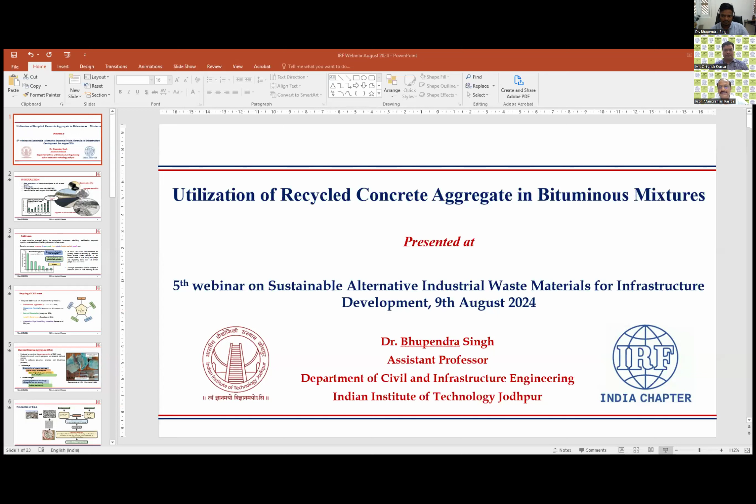Sir, is my screen visible? Okay. Yes. Okay. So thank you so much for such a warm introduction. Dr. Bhupendra, sorry, the slide is not in full screen mode. I can see it slide by slide, not in full screen. Okay, sir. Just give me a minute, and I'll share again. So is it in the full screen mode? No, it's not. Okay, just give me a minute. You are sharing through share screen only? Yes, sir. I'll share the entire screen, sir. Yeah, I think that will work. So is it okay now? Yeah, it's now good. Please go ahead. Thank you, sir.

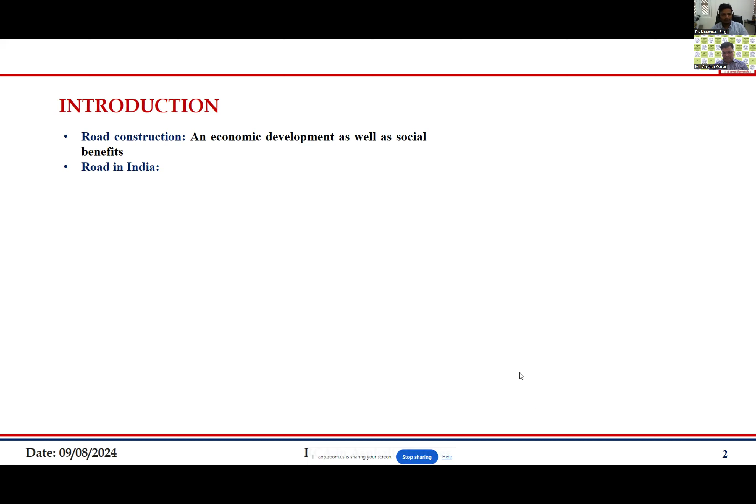When we talk about the road network in the world, we have approximately the second largest road network in the world, just behind USA and in front of China when it comes to length. The 2016 MoRTH report cited approximately 6.22 million kilometers of road length. Since 2016 we are again constructing roads at a very high pace. In this figure, with data taken from NHAI, you can see the highway construction rate per year has been increasing from 2015 to 2020. It has more than doubled, because in 2015 it was around 1500 kilometers of highway that we were constructing.

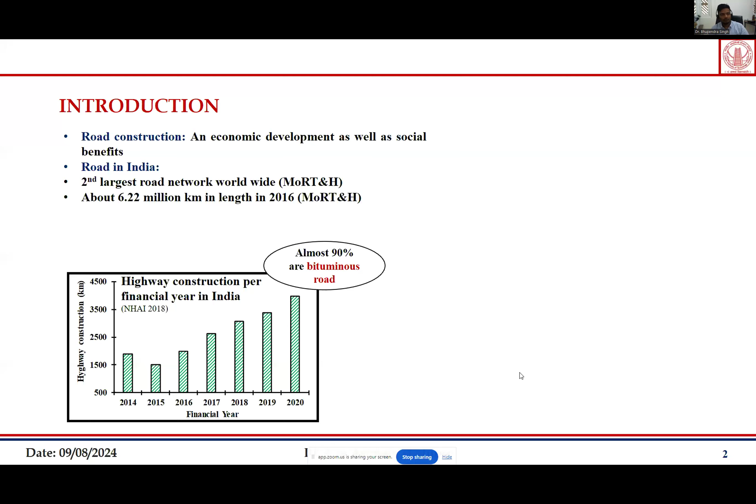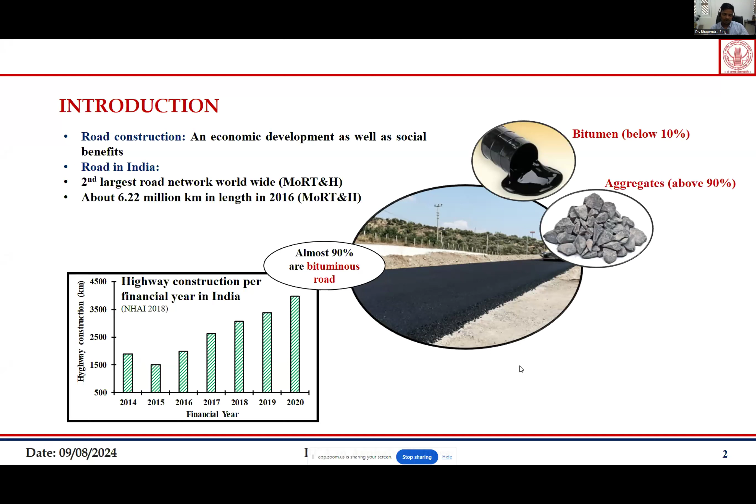So now in 2020, it is approximately 4,000 kilometers of highway that we are constructing. If we see the road network in India, almost 90% of these roads are flexible pavements, and out of these, most are bituminous roads with an asphalt concrete top. When we talk about bituminous concrete or bituminous mixture, bitumen is just below 10% of the total mix composition, and aggregates are above 90%. So aggregates make up most of the proportion of the asphalt mixture. Although it is good that we are constructing the road network at a record pace, which is the requirement also, it comes with some problems.

And what are the problems? One of the problems is the non-availability of good quality aggregates. In some parts of the country, the availability of good quality aggregates is very difficult, and even if those aggregates are available, if we consume too much of them, then that causes the depletion of the natural resources, because for the production of these natural aggregates, very environmentally harmful quarrying and blasting functions go on.

So that is not good for the environment. That is why that is a major concern, and that is the major challenge that the construction industry is facing nowadays. Now coming to another problem which we are facing nowadays, that is the production of construction and demolition waste. A waste material which is produced during the construction, renovation, rebuilding, modification, expansion, repairing and demolition of buildings and other infrastructure is called construction and demolition waste.

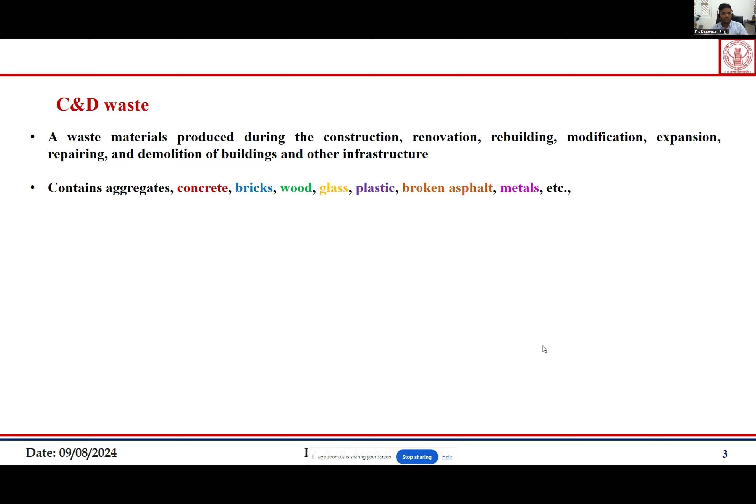When we talk about construction and demolition waste, it is composed of many things, which contains aggregates, concrete, bricks, wood, glass, plastic, broken asphalt, and metals. Whatever things you will find in a building, all those things are present in construction and demolition waste. But the major chunk of this construction and demolition waste is the concrete that we get out of it.

Now, this figure shows the construction and demolition waste that every country generated in the year 2017. Here we can see China is generating a lot more construction and demolition waste, and the next country is India, and then the USA, and some of the Western countries, which are France, Germany, UK and Brazil. The Western countries have one advantage: the disposal and recycling of this construction and demolition waste is very high. So most of their construction and demolition waste gets recycled.

But when you talk about India and China, the rate of recycling is very low. In fact, in India, disposal is also very poor. Proper disposal is not there, and whatever gets properly disposed, the recycling is again very low. Some of the problems generated due to that: for disposal, if we take it to some dumping yard, that consumes valuable land, and land is very precious nowadays. Another problem due to improper disposal, or even with proper disposal, is that it causes air pollution, land pollution, and due to leaching, groundwater pollution can also happen. So these kinds of problems are associated with it.

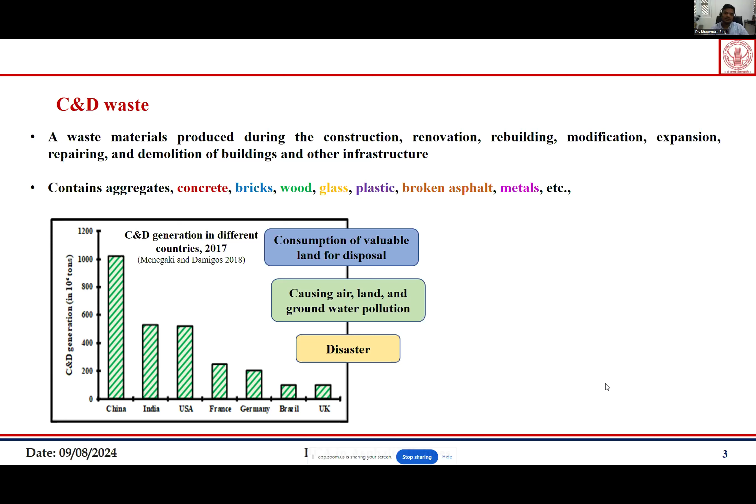Now another new kind of problem which we don't usually associate with construction and demolition waste is disaster. There are two instances which I'll be reporting here. One is, we all remember the devastating 2015 Chennai flood, which killed approximately 500 people and displaced around 1.8 million people. One of the factors which increased the intensity of that flood was construction and demolition waste. There was improper disposal of construction and demolition waste, and that C&D waste got into the sewer system and choked the sewer system of Chennai. So the water could not drain out from the areas, the intensity of that flood increased, and that caused the loss of so many precious lives.

Another such incident was reported in China, where an illegal construction landfill collapsed, which claimed 75 lives. That is also in 2015. So this shows that if proper disposal, and not only disposal but utilization, of construction and demolition waste is not done, then it may cause disasters also. So now we are coming to the topic of this presentation, which is the recycling of C&D waste and reusing it for construction purposes.

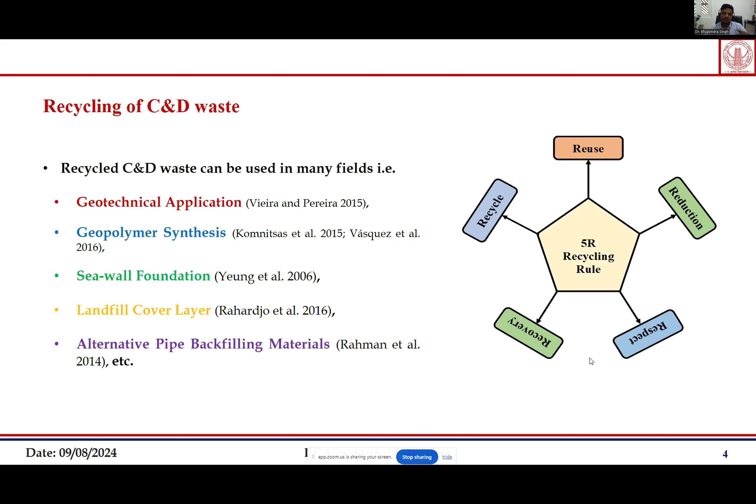Recycled C&D waste can be used in many fields. People have used it for geotechnical applications, meaning for ground improvement purposes. For geopolymer synthesis also people have used it. For seawall foundations people have used it. It has been used as landfill cover, which has been reported in the literature. And as an alternative pipe backfilling material also people have used it. But in this presentation we will be concentrating on the use of C&D waste in asphalt mixtures, because that is my research area.

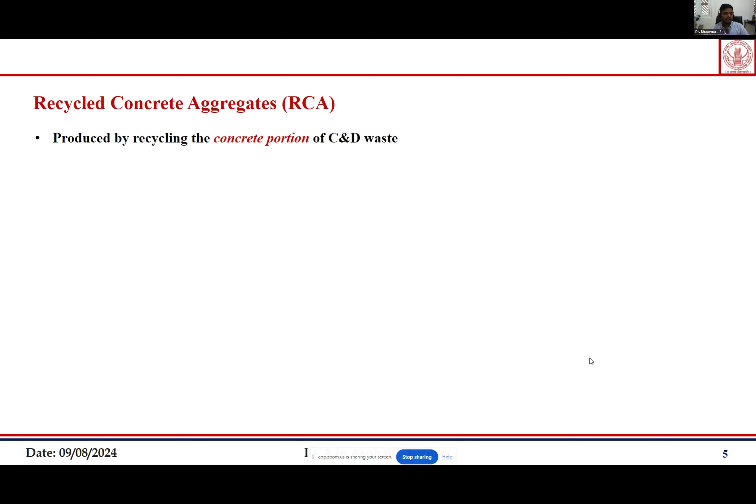So coming to the recycled concrete aggregate, what is recycled concrete aggregate? As we talked, a big chunk of the C&D waste is old concrete blocks that are generated. So if we recycle those concrete blocks and get the aggregates out of them, then that is called the recycled concrete aggregate. So when we see any recycled concrete aggregate, it contains natural aggregates, which we can see here, and then there is a layer of adhered mortar, because it was part of concrete, so there will be some mortar which is still attached to those aggregates, and that is what you will find in any recycled concrete aggregate.

Now people have used this recycled concrete aggregate in the unbound pavement layers, cement concrete and bituminous concrete also. Now, what are the advantages of using this C&D waste to replace some of the natural or virgin aggregate? First is the preservation of the natural resources, because it replaces some of the virgin aggregate. Then the requirement of the virgin aggregate goes down, due to which preservation of the natural resources happens.

Then, if we compare the energy consumption in the production of the C&D waste and in the production of the virgin aggregates, we will find that production of the RCA, or recycled concrete aggregate, consumes less energy as compared to producing virgin aggregates. And because we are consuming less energy, the harmful gas emissions are also low in case of recycled concrete aggregate. And there are many cost benefits also associated with recycled concrete aggregate.

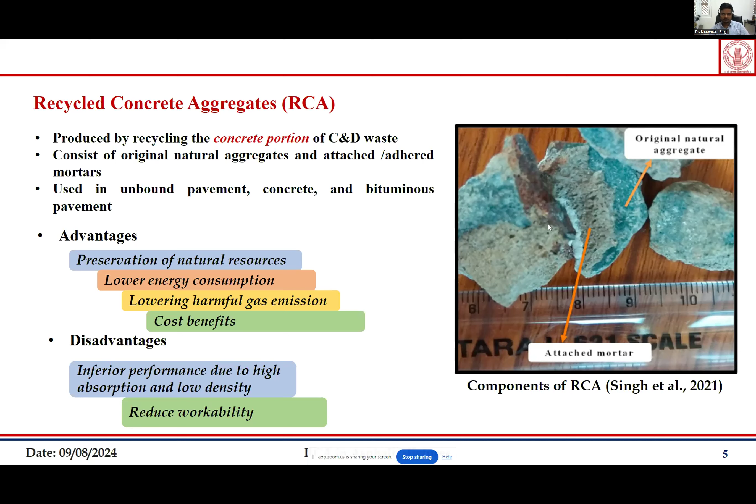Now moving on to the production of the RCA. I'll go fast in this. So first, this C&D waste is generated. There are two sources of generation of this C&D waste. First one is the artificial source, which comes through construction and demolition practices, and second one is the natural source, which comes because of disasters. So earthquake, flood, cyclone, because of these, a lot of C&D waste is generated in a very short period of time. So when we get this C&D waste, it is like a large chunk of concrete.

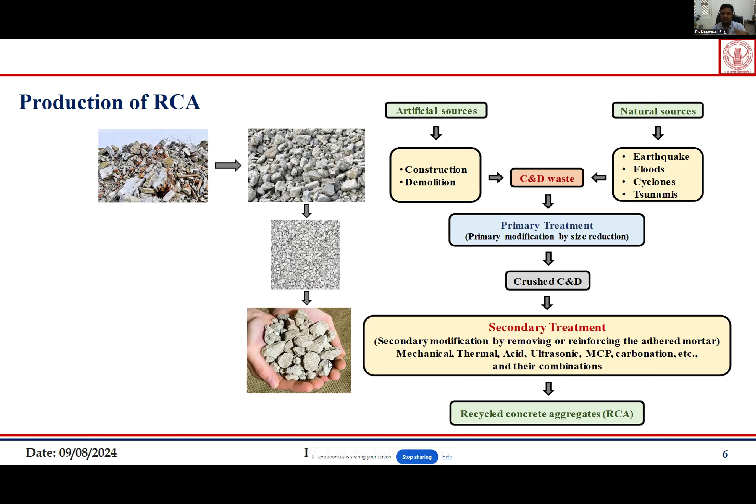Then we do the primary treatment. It means we break it down into manageable pieces, which you can see in the second figure. Then from there we get the crushed C&D, construction and demolition waste. Then the secondary treatment takes place. It means we try to remove the layer of that adhered mortar, because that is the problem, or we try to reinforce the layer of that adhered mortar in its place. So that is how secondary treatment takes place, and finally we get the recycled concrete aggregate out of it.

Now there are many methods of treatment of the RCA. The first type of methods comes under the category of removing the adhered mortar. We want to remove whatever mortar is present on the aggregate surface. So the first treatment type is thermal. We remove the adhered mortar by heating it up to a very high temperature. Due to that heat treatment, because the coefficient of thermal expansion of aggregates and that of adhered mortar are different from each other, some thermal stresses develop, and then the adhered mortar gets detached from the surface of the aggregate.

Second one is the mechanical, and most common one. In the mechanical method, we use some of the mixers, or in the laboratory we use the LA abrasion machine also. So we use abrasion and attrition techniques to remove that adhered mortar which is present on the aggregate surface. Then ultrasonic methods are also used.

So first we dip our C&D waste into the water, and then we apply some ultrasonic waves, and due to the application of these ultrasonic waves, the mortar gets removed from the surface. Then people use some acid soaking techniques also. In that, we prepare acidic solutions and soak our C&D waste in them. Then the acid reacts with the hydration products present in the mortar, and it gets removed from

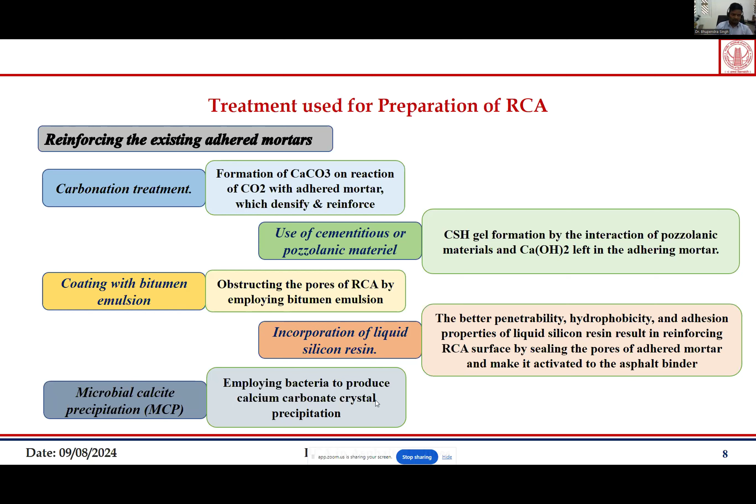Incorporation of liquid silicon resin people have also used, and nowadays people use MCP bacteria also. We apply the bacteria on the aggregate surface, these bacteria produce calcium carbonate crystals, and these crystals improve the bond between the adhered mortar and concrete. So these are different methods people have used.

If we see the characterization of RCA, physically they are very highly absorptive in nature. They have lower density, higher impact value, higher abrasion values, higher crushing values, and they are rough, porous, flat, and irregular in shape. In the chemical characterization, you will find that SiO2 content is really high in these recycled concrete aggregates, which is a problem from the asphalt mixture point of view, because aggregates with higher SiO2 content are poor at bonding with the asphalt binder.

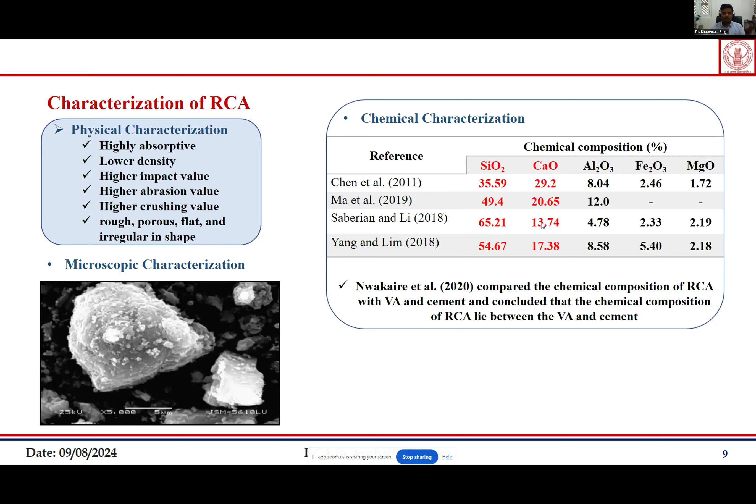Coming to the microscopic characterization, you will see that the surface of RCA is much rougher compared to natural aggregates. So these are the characterizations of RCA. Now moving towards modification, people have used different modification techniques and have also combined techniques, as we have discussed: physical, mechanical, thermal, and acid soaking techniques, and they have found that these techniques work really well.

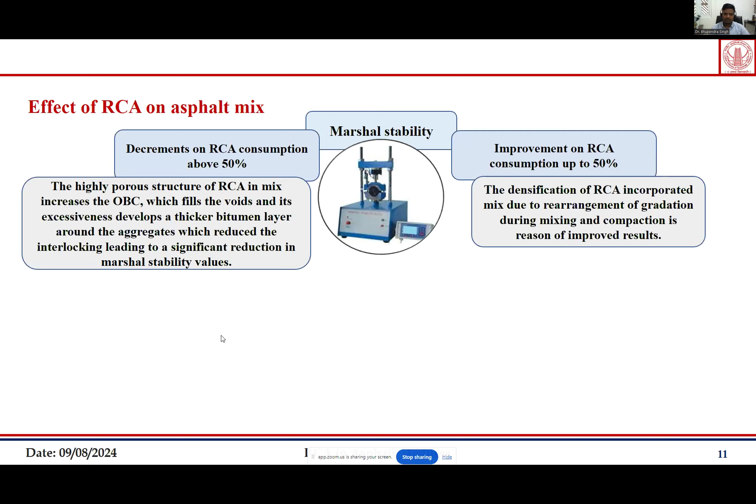Now, what is the effect of using RCA in asphalt mixtures? RCA is very variable in nature, because most of the time, whatever RCA we are collecting, we don't know the history of that concrete, where it is coming from, and what its specifications are. So in each of the properties we are talking about here, you will see some studies have found RCA to be really improving those properties,

because in some cases RCA has some unhydrated cement particles, and they get hydrated, due to which they improve the performance, and that is what we also found in one of our studies. RCA has a rougher surface also, so due to that rougher surface, the interlocking gets better in some cases.

So in Marshall stability, people have found that if you use RCA above 50%, the Marshall stability values go down. Researchers have also used up to 50% and found that it actually improves Marshall stability. Similarly with ITS, the same trend was seen.

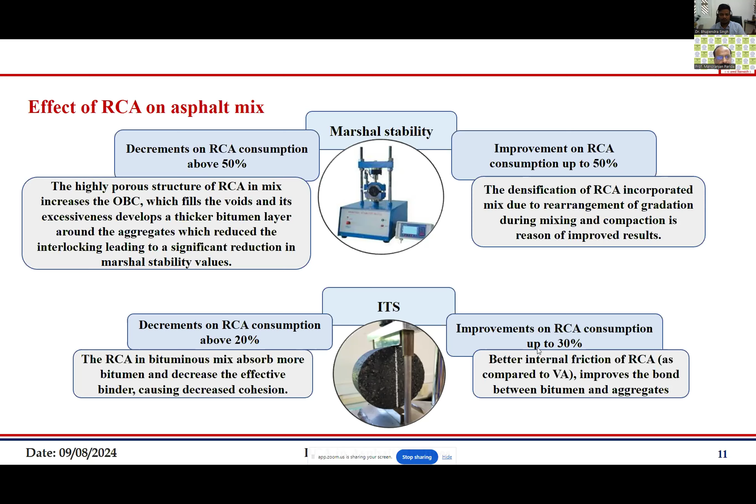Similarly the case was there for rutting, for fatigue, and for resilient modulus values also, and moisture susceptibility and low temperature performance also. So in each of these cases, people found that in some cases it improves the properties, and in some cases it decreases the property.

So from here the problem primarily associated with RCA comes to the forefront - there is too much variability in whatever RCA we are collecting. That is the major problem, and that is why field implementation is also not getting much traction at the moment.

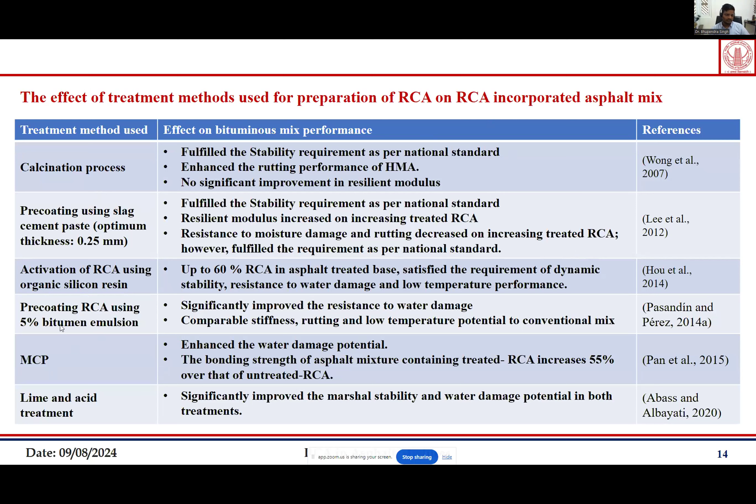Then MCP is there, pre-coating the RCA with bitumen emulsion, using lime, and many studies have used cement also, because cement is a very popularly used filler material in asphalt mixtures, and it is easily available. So many studies have used cement to coat the aggregate and then use it in asphalt mixtures, and they found that it performed really well.

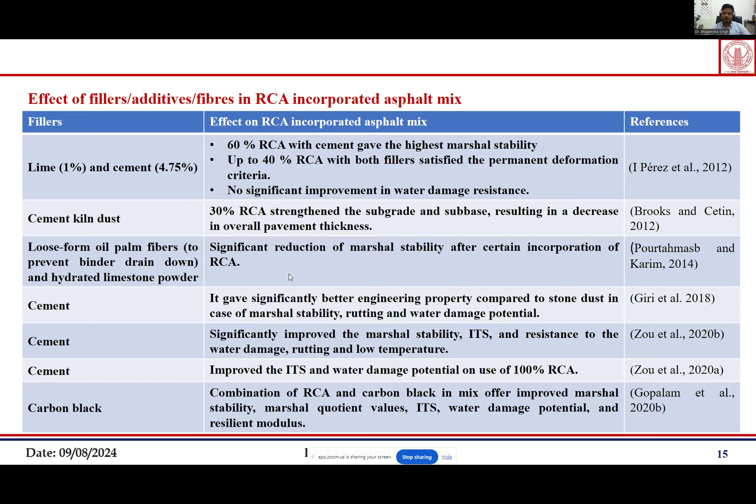But there are some problems associated with RCA. We have shown that RCA can be used, and there are some treatment methods using which we can improve the properties of the RCA and asphalt mixture also.

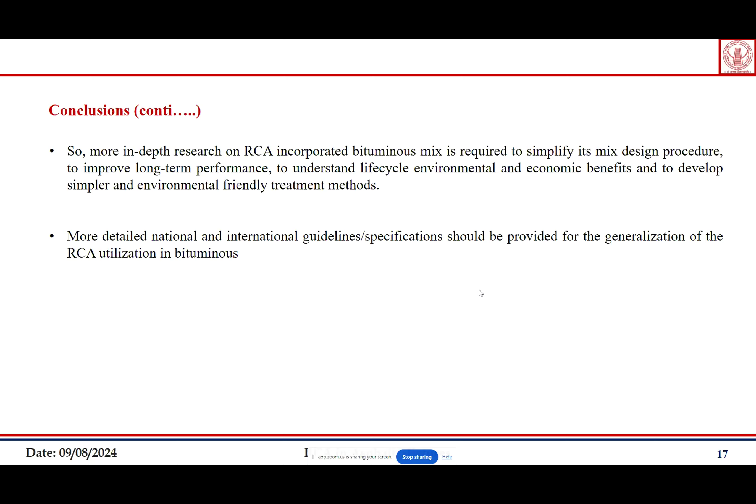But at the moment, the problem is the variability in RCA quality. Currently there are no standard treatment methods for RCA treatment, and no mix design method for RCA. Because of all this confusion, I feel practitioners are still hesitant to adopt it in the field. That will be my concluding remark.

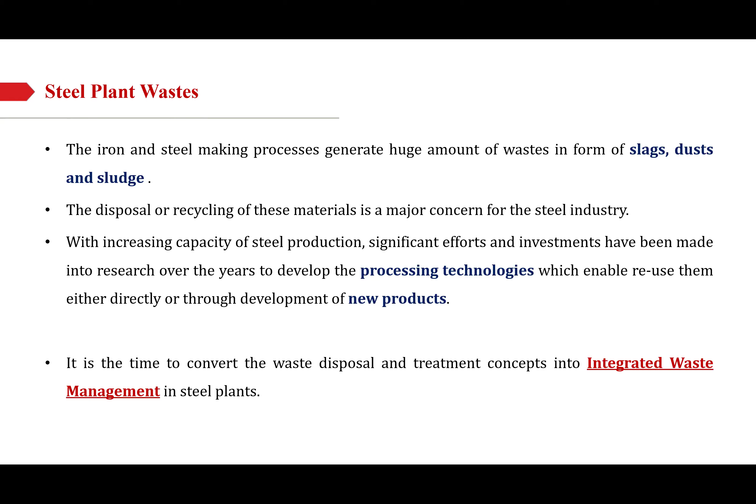But again, when I say we want to recycle the material, we want to reuse the material, the word sustainability comes into picture. Sustainability has a quite broader umbrella - it not only encompasses the application, but also has to take care of the economics of disposal. You cannot simply dump it; you have to find some way, some means by which it can be economically converted into an application.

When I say sustainability, there are two parts of it. First is the technology part of it, and usability, and second part is the economics. The examples I'm going to share with you today actually take care of both and make good business opportunities for a lot of prospective entrepreneurs, and a very win-win solution for both the steel industry as well as the construction industry.

Normally, when we see the steel plant, it has a huge cycle, starting from the iron ore, what we receive, we beneficiate, then agglomerate, then iron making, then steel making, then rollings, etc. And there are so many wastes being generated at different points. During beneficiation, we generate a lot of tailings, then dust at a lot of places, sludge at many steps of processing, then slags, and then scales.

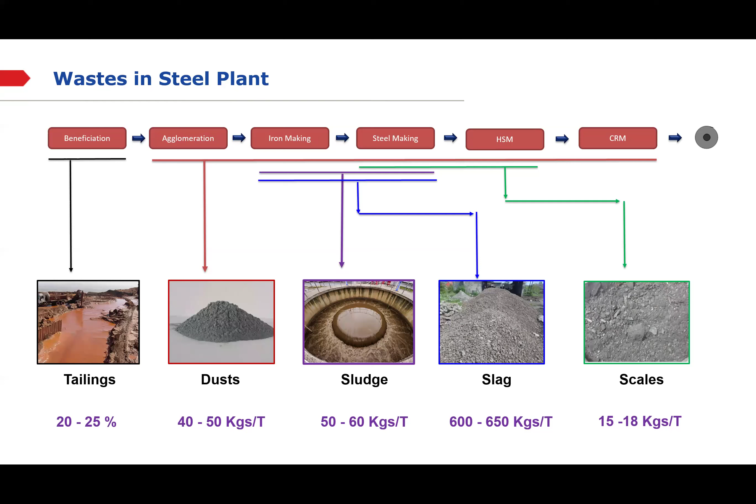Now, if you see these quantities, the biggest component among all these is slags. I would say if slag is taken care of, almost 75 to 80% of the total waste generated is taken care of. When I say these wastes are being generated, we need to actually understand them by putting them into certain groups.

We see that we can put them into two categories. Tailings and slags are one type of category where you have maybe a little bit lower iron, but higher silica and alumina, whereas dust and sludge mostly contain higher iron. So most of the technologies which have been developed in iron and steel industry basically direct the dust, sludge, and scales to recycle back into the process of iron making, steel making. But the tailings and slags are the kind of byproducts which are basically seen to be used outside the iron and steel making process in some other industries.

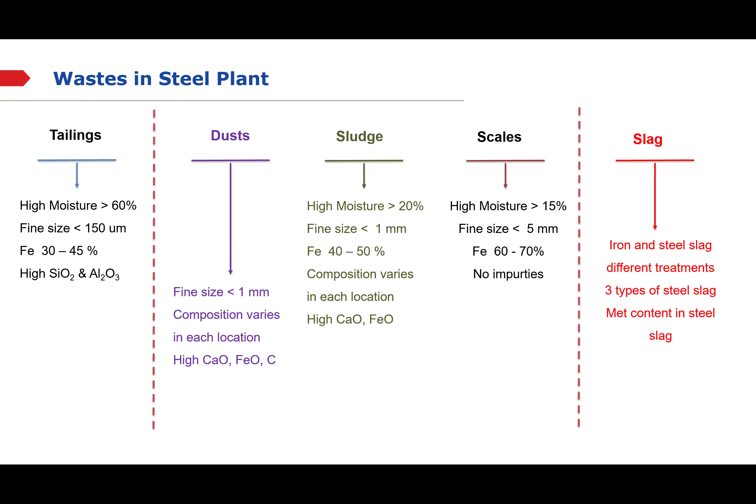That's the basic concept of all the waste which is being done. Now, let me tackle one by one on this tailings and slags.

Tailings is nothing but what we generate as a byproduct during the beneficiation process. We get a lot of low grade ores. We have a step of beneficiation where we upgrade the iron ore from a particular value to a higher value, and then the gangue is separated out. They're normally wet in condition and normally used to be stored in large tailing ponds, etc., which end up in a lot of issues sometimes when its bund breaks, etc.

Now new technologies have come up where we use a press filter, we dewater them, and then we use it back in mine backfill. This is a very interesting application which has recently come up, where dry disposal of these materials has come up, and because of the concerns of the mining industry of rehabilitation and reclamation, etc., the tailings have become a very good solution to build and maintain those mines which have been left out after sufficient mineral has been taken out.

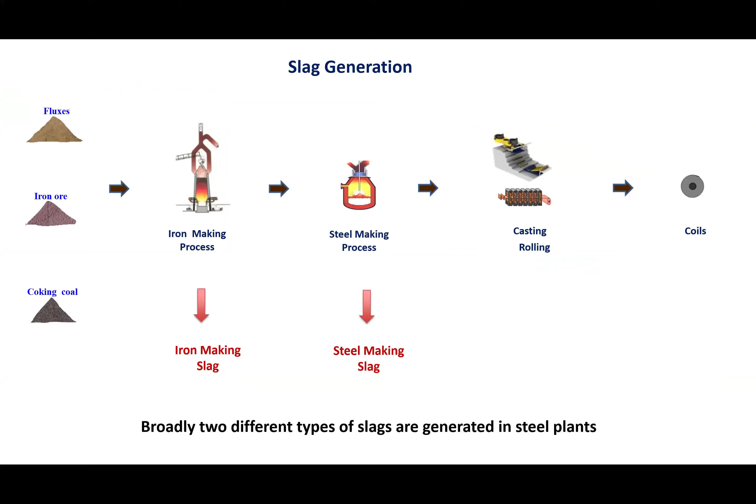Coming back to slags, normally slags are generated in two steps: iron making and steel making. And again, in steel making, there are different types of slags. All these slags which are generated from iron making, steel making process normally come in molten state, and they are processed differently based on different technologies.

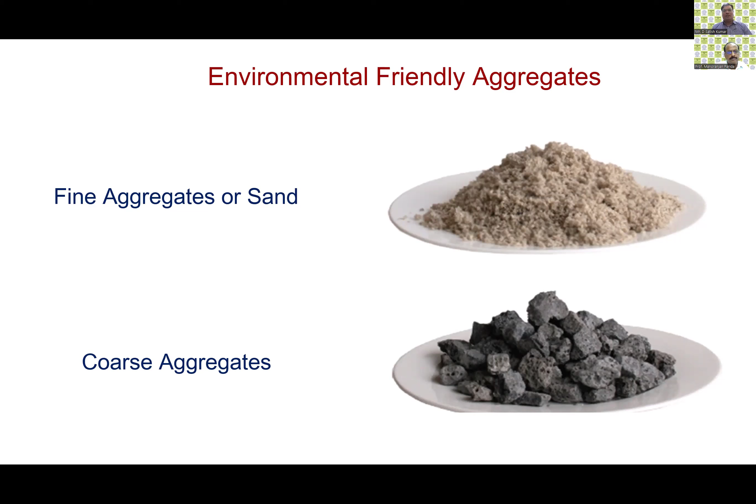But finally, what we are trying to claim is that all these slags can be converted into fine aggregate as well as coarse aggregates. Both can fit to match the specifications of fine aggregate and coarse aggregate, which are being used in all the construction applications. I will share many examples starting with this.

When I say we generate two types of slags, the iron making slag and steel making slag - if we see till now, not much of these slags were getting utilized. Maybe what I'm saying is till 5-7 years back, and a lot of interest has come up from both sides to convert them into specified aggregates, and then the acceptance of these aggregates by the construction industry also.

So iron making slags are normally granulated, and used to go for cement making. But over a period of time, with increasing capacities, iron making slag also is getting accumulated by steel plants. Steel making slag normally used to get dumped because of its own inherent properties of containing iron - it's non-cementitious. And if you go to any big steel plant, you will find mountains of these slags lying there, stored over past few decades.

And today we have a solution by which it can be converted into aggregates. Coming to iron making slag, as I said, most of this is normally granulated and used for cement making, and a part of it which is not granulated is normally used for landfilling and dumping. What has been done recently is that especially this granulated iron making slag, which looks like river sand but has never been utilized as a fine aggregate or a replacement of river sand.

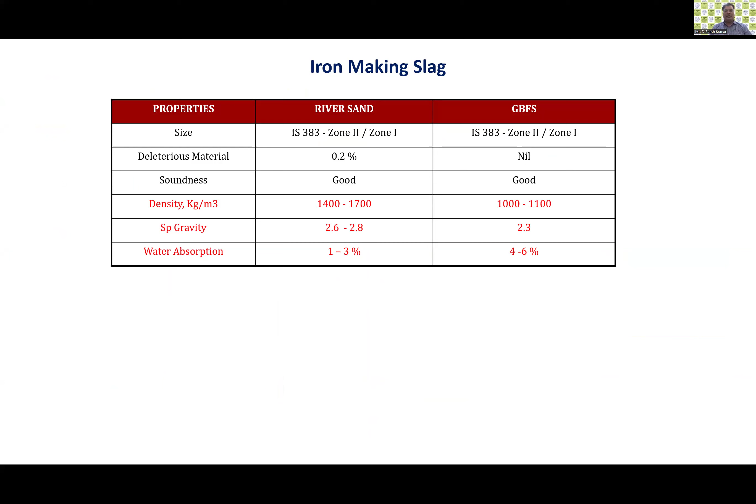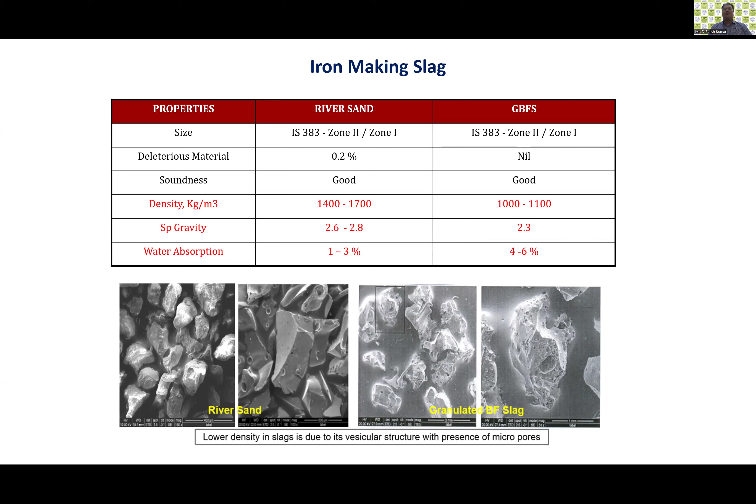What we have done here is we tried to investigate what could be done to this granulated blast furnace slag and convert it into fine aggregate. We made a comparison with river sand. We find that granulated blast furnace slag was having lower density and lower specific gravity, higher water absorption. Those were the primary reasons by which it has been tried but never commercially utilized for being used as fine aggregate.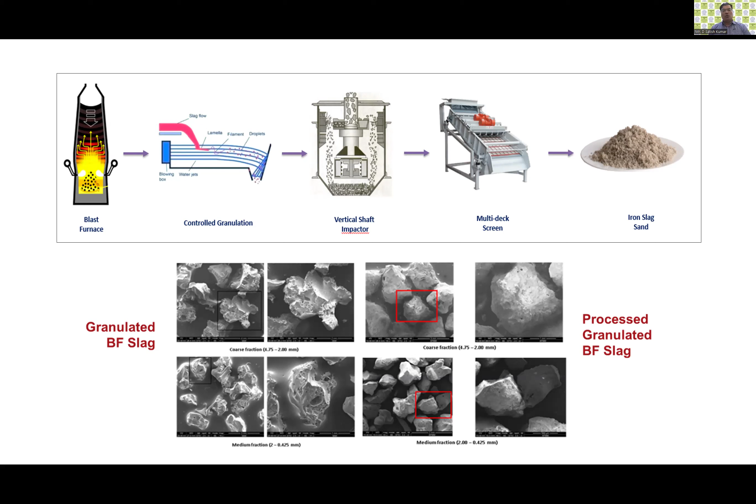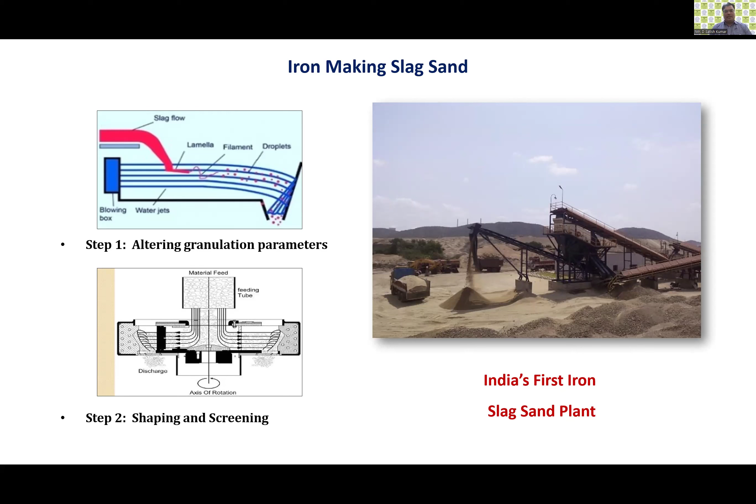Once it was compared, we find that this process granulated blast furnace slag could be 100% replacement to the river sand which is being used in the construction industry. That's how at JSW Steel Vijayanagar Works, we set up India's first iron slag sand plant. For the last 7 to 8 years, more than 3 million tons of this manufactured sand or granulated blast furnace slag sand has been sold in and around Karnataka, Kerala, and Tamil Nadu, etc. That's a very, very ideal example of converting waste into a product.

Recently, we are also developing a technology by which this granulation process, which used to happen with water and was one of the reasons for highly porous material, has been replaced with dry granulation of these materials. By doing a dry granulation, I'm getting a more rigid structure, and these fine aggregates can be utilized and found more useful, more rounded directly, and a lot of processing steps can be avoided. So this is also a development which has been done from the iron and steel industry to convert these wastes into products which can be sustainably utilized in other industries. Dry granulation is kind of a future technology which is coming for iron and steel making people, especially for granulating this blast furnace slag.

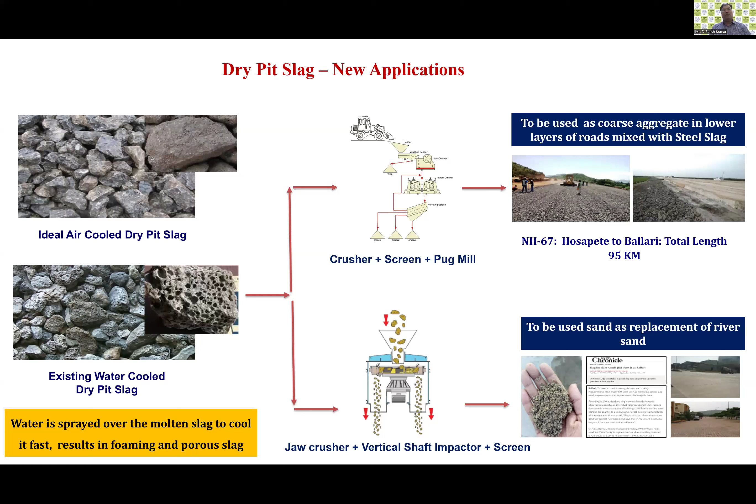During the iron making process, we also get some amount of coarse slag or solidified slag in the pit which comes out. This can also be processed and utilized either as coarse aggregate, or we can crush it and utilize it as fine aggregate. We have done both these exercises at JSW Vijayanagar Works and in NH67 Hosapete to Ballari Road. A lot of this crushed dry pit slag from blast furnace has been utilized in road construction. We also crush it to very fine pieces, and a fine aggregate has also been made using this material. These technologies are now commercially established and running at Vijayanagar Works.

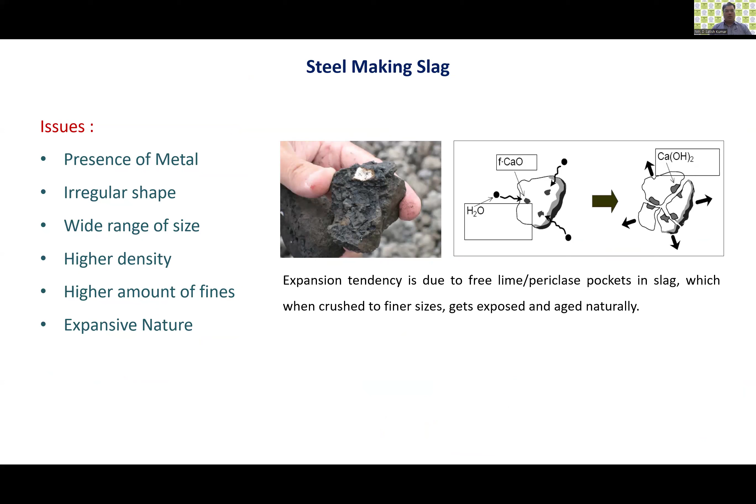Coming to steelmaking slag, it always has inherent issues because of its expansion behavior, which comes from the free lime and the free MgO present in it. It also contains a certain amount of metal. It has higher density, its shape is quite irregular, and that's why it never attracted the attention of the construction industry for being used as an aggregate. Over a period of time, a lot of solutions have been developed to age these materials, starting from natural aging to dry and wet aging to open steam aging, even pressurized steam aging and steam box technology. Even chemical stabilization of these slags has also been developed.

These are the kind of technologies which are being developed in-house at many steel plants around the world. These technologies make this slag conducive and matching to the specifications of the construction industry for these aggregates which are being used. Now, these are additional steps which are being adopted and commissioned in many steel plants, including JSW Steel, where we are trying to convert this waste, avoid dumping, and convert it into products to be used.

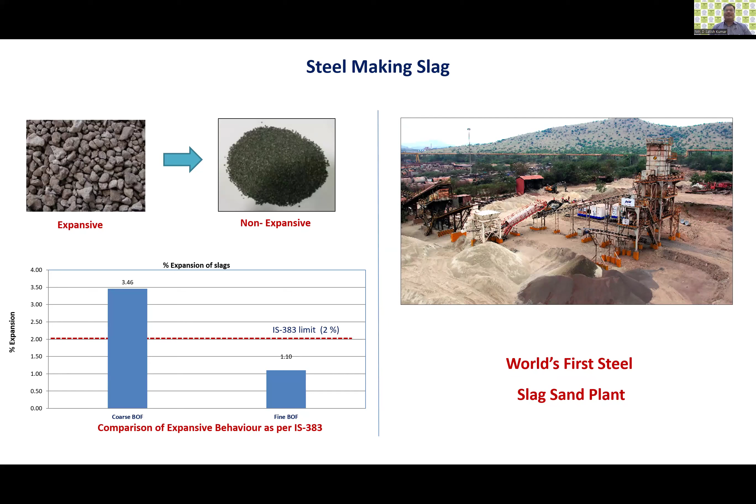What we have done at our place is we try to crush them very fine. Otherwise, because of the expansion behavior, if it has to be used as a coarse aggregate, we need a lot of aging steps to convert them into product. We crush them and make it very fine, where its expansion behavior significantly reduces, because the free lime and the free MgO present in it, which are expansive in nature when they come in contact with water, get removed. The process has been developed in such a way that those fines are sucked and removed, and that's how the world's first steel slag sand plant has been established at JSW Vijayanagar Works, where we started converting our steel slag into steel slag sand.

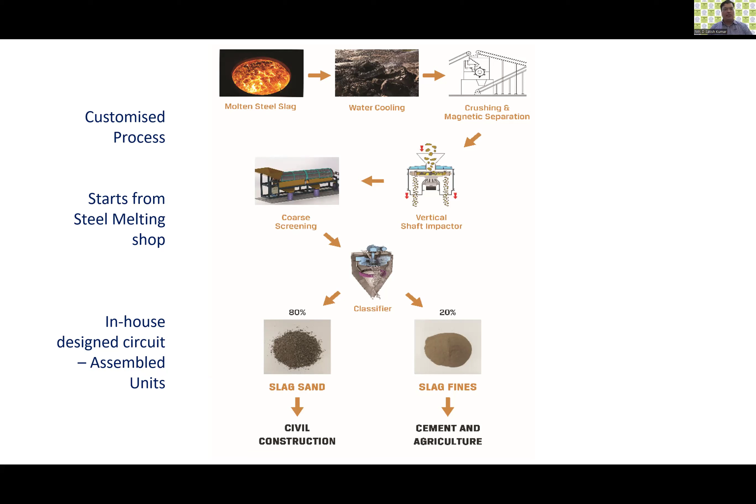This process is a little different from what we used to make sand from our iron making process, where the fines were not an issue. Here, the fines were a bigger issue. So we have adopted a dry classifier where the fines are sucked and removed, and that's how we get two different products out of this whole process. With the process patented by us, we get a slightly higher density sand for use in civil construction, and these fines can be used in cement and agriculture. That gives an end-to-end solution for this huge amount of slag generated in steel plants, which normally used to get dumped, and is now getting converted into products for the construction industry.

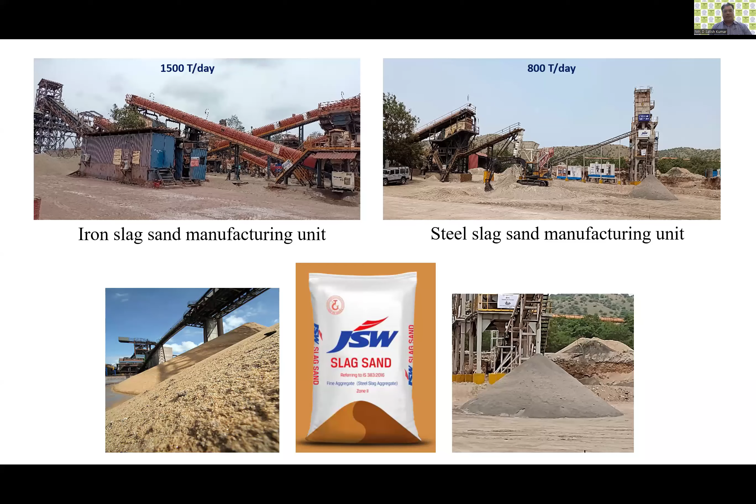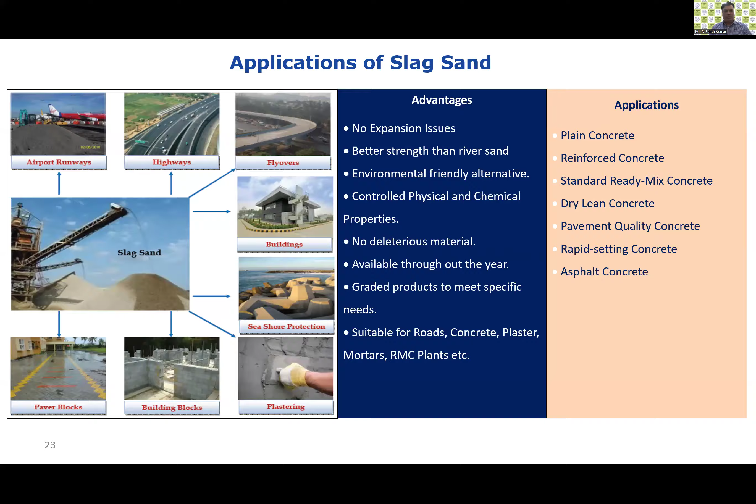That's how at JSW Steel we established a 1500 tons per day iron slag manufacturing unit and a steel slag manufacturing unit, first of its kind in the world, at a single location, where the waste is converted into a very useful product supporting the construction industry. These fine aggregates are way ahead, and we call them eco-friendly because river sand comes from rivers and M sand comes from mountains, and they both impact the environment. This is eco-friendly, available throughout the year, with very consistent composition from the iron and steel making process. These have been tried at various agencies, including CRRI, and found usable for almost all applications: buildings, paver blocks, plastering, highways. We even started using it internally.

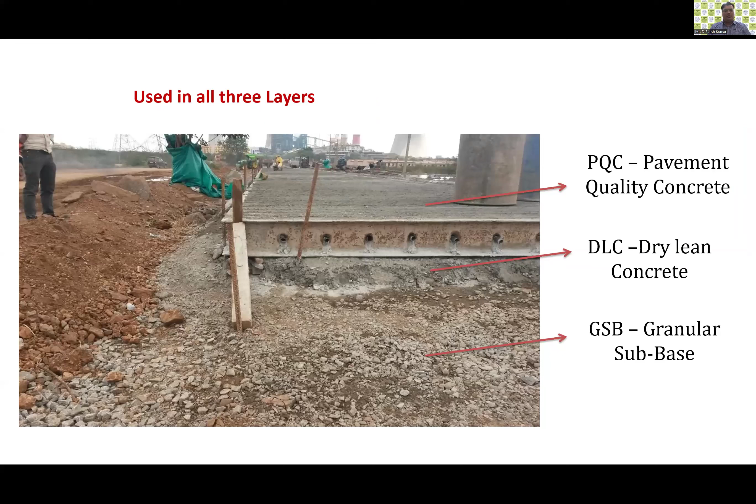Iron and steel making units are very heavy industries. We make steel coils of 20, 30, 40 tons, and the floorings and other construction areas have been built using these slags, working for many years under these heavy loads. We have also specifically started using them in roads, because roads are one area where a large amount of these slags can be consumed, both in coarse and fine form, and all different layers have been experimented. We also tried at NH67 Hospet Bellary, using electric arc furnace slag and blast furnace slag.

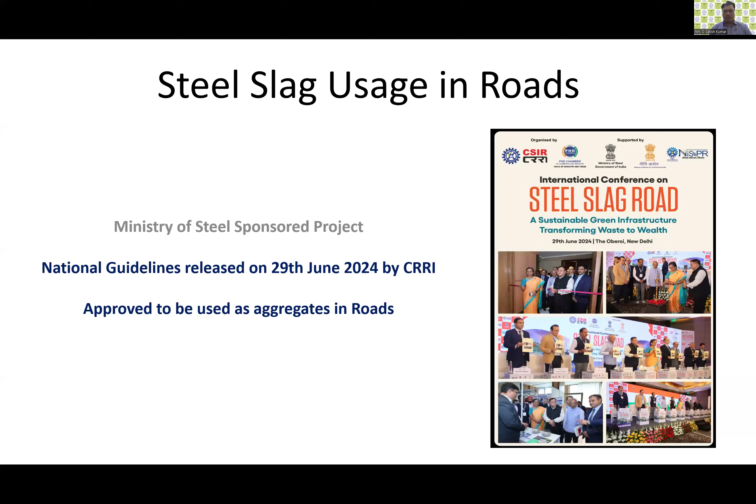But the most important thing done in recent years: all steelmakers were doing this slag utilization in their own domain. Recently, the Ministry of Steel and CRRI came together on a national project for developing guidelines for steel slag, which brought a lot of clarity, and CRRI released these guidelines for use in roads in June. The most important part is this table, which gives guidelines to all steel makers as well as users, for the first time, I would say, in the world. Mr. Satish Pandey and his team have come up very clearly with the limits for BOF, EAF, and CONARC type slags, the permissible limits, and the test methods to be utilized.

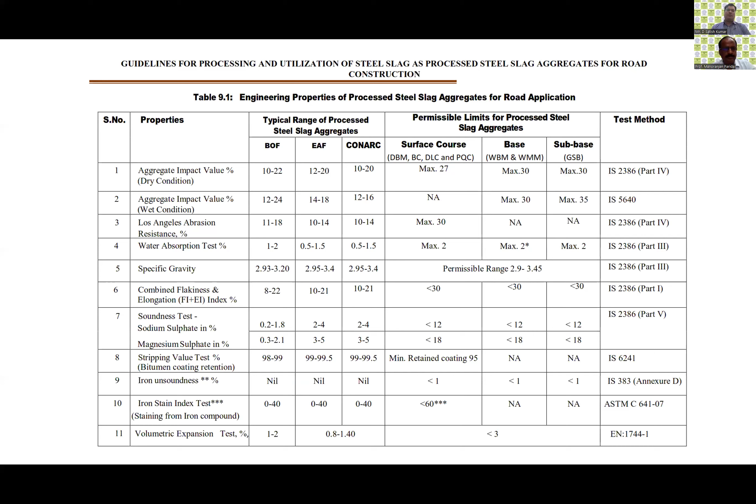So with this very clear specification available, it opens the door for utilization of these slag aggregates, both in coarse and fine form, in road applications. The key points which have come up from that study, where we were also a part along with other steel makers, are that there could be reduction in the bituminous road thickness. There could be conservation of around 80,000 tons of natural aggregate for every construction of 1 kilometer of 6-lane road. Reduction in the cost comes up because of the slag being utilized, durability is improved, and finally we can say that greenhouse gas emissions are also reduced because of the use of these aggregates.

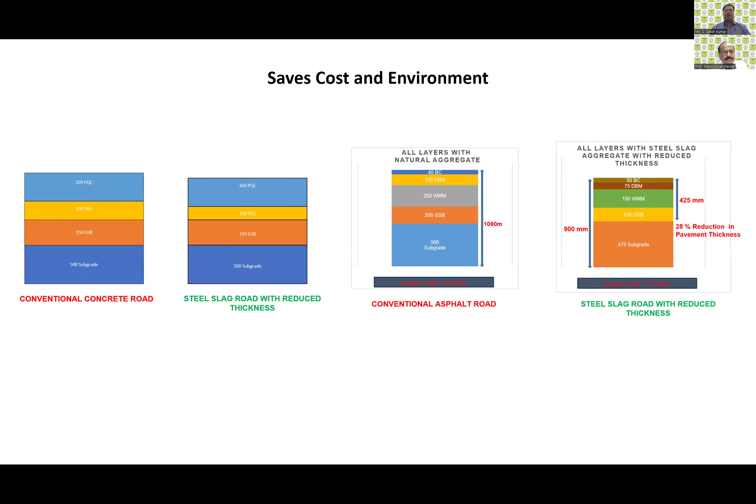Very aptly, these things have been shown in that report, where as compared to conventional concrete road as well as conventional asphalt road, there could be significant reduction in the overall thickness for the same load applications in both the roads. CRRI and Satish Pandeyji's team have also demonstrated taking slags from our steel plants at various locations in the country, where on-site applications have been demonstrated, starting from Hazira in Gujarat, then Dolvi in Maharashtra, in the Northeast, at many places, and these roads have been tested and have been working very aptly, matching all these specifications.

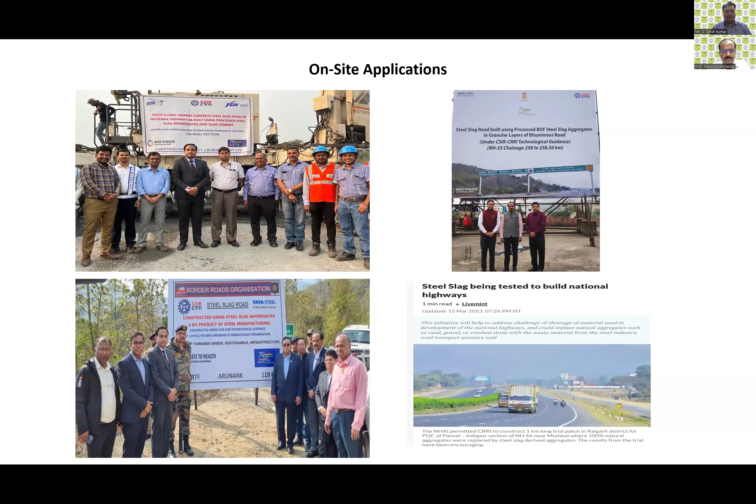Apart from this, sorry, yes, sir. It's time to wrap up. Maybe, yes, I'm just finishing in another 30 seconds.

Thank you. So apart from these applications, we are also working, especially at the steel making sites, on rural roads where you don't use too much bitumen or concrete. The slags on their own have their own hardening behavior by carbonic or hydraulic reactions. Mixing of steel slag and iron slag along with an activator simply acts as a good bed for rural applications. This has been tried at many places inside our plant at the construction sites.

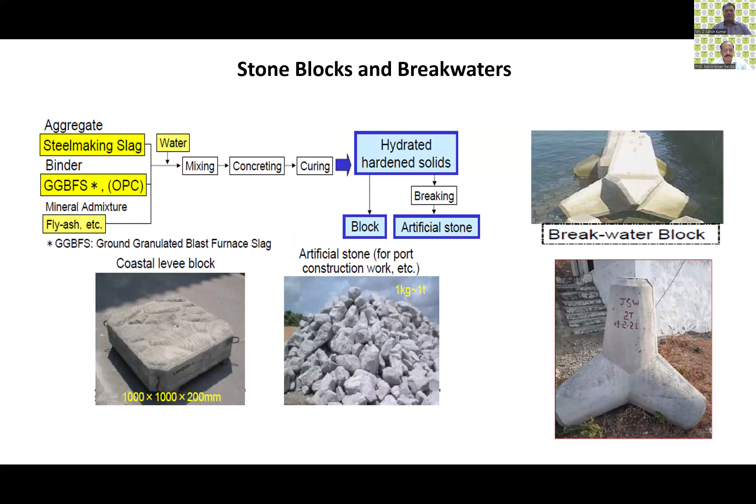Apart from this, we are also working on developing stone blocks and breakwaters using the slag aggregates. Much testing has been done with many agencies, and we have been using them in some of the areas at our coastal plant in Dolvi. They have been found to be very good applications where these big stone blocks are not available, and this waste slag can be converted into these kinds of applications. Another interesting application which is coming up is railway ballast, where these aggregates have been found to be useful. This is also under study, and we hope that these new applications will come up very soon and will be utilized in large proportions from the slags generated by iron and steel plants.

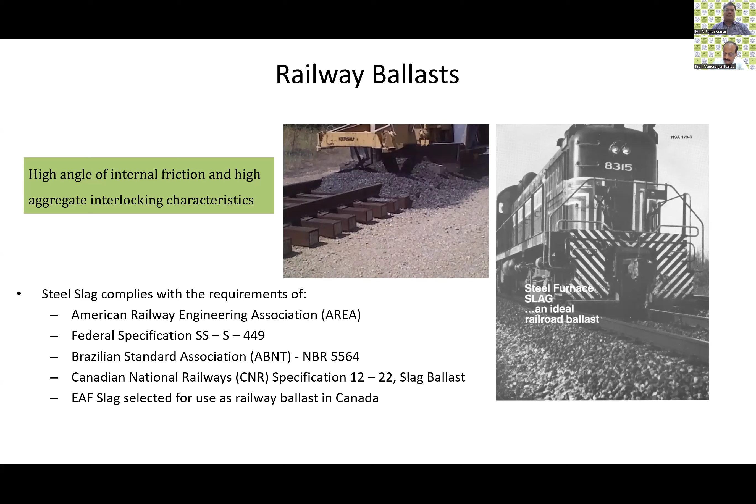Finally, what I conclude is that, especially from the steel perspective, we have taken a fresh look to minimize this waste, and we are also looking into a zero waste concept where we want to utilize it 100% in certain applications. The examples I have shown of how slags can be converted into aggregate for construction applications are a very good example of converting waste, not just into some product, but into wealth, which gives a clear definition of sustainability in terms of application as well as economics. Thank you very much. That's how I end my presentation.

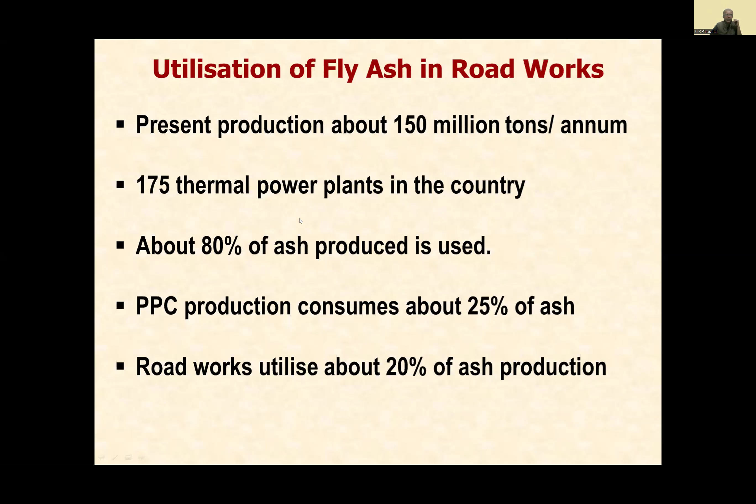Yeah. So this fly ash can be used in various ways in roadworks: as a fill material for embankments, both reinforced as well as unreinforced embankments. You can use it in pavement works also, for flexible pavements in the form of stabilized layers, and in rigid pavement as an admixture with cement concrete pavement. We have to characterize the waste materials, and fly ash has been environment tested and accepted as an environmentally safe material.

It has many favorable properties: lightweight, higher shear strength, and easy to use in the field. And even when it is raining, we can roll that fly ash material. So many favorable properties are there, so it is being widely used. Please go on. Next slide.

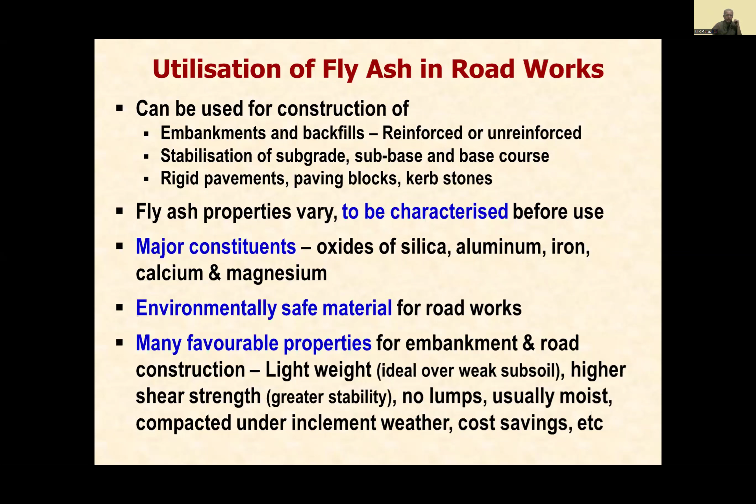Please change the slide. Yeah, this is the manner in which fly ash embankments are constructed. In the center of the embankment, we use fly ash, either the bottom ash or the pond ash type. And then we provide a side earth cover, and on the top also another earth cover, which will also act as the subgrade soil.

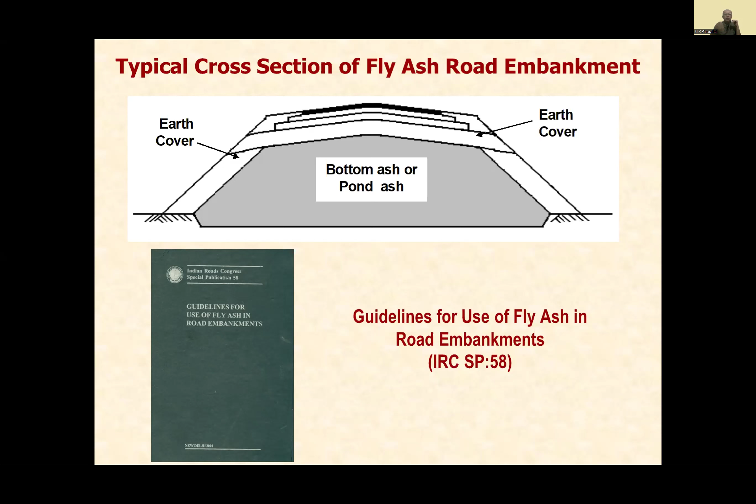So to prevent that erosion, we will have to provide a protective earth cover, maybe 0.5 meter, 1 meter, 1.5 meter, depending upon the height of the embankment. If the height of the embankment is more, the earth cover thickness required will also be more. If the height is less, less thickness of cover will suffice. This kind of cross section is similar for different types of industrial waste, including fly ash. Next slide, please.

So on this one particular project I am telling about, this is Wazirabad, the Signature Bridge, which is very famous.

Many of you would have seen that. When this bridge was being constructed, you can see in the first photograph, that was the condition. So much waterlogging was there. It was a low-lying area just by the side of the Yamuna River. So much waterlogging during flooding used to take place, and that water used to remain there for months together.

In that particular location, the embankment had to be built: about a 10.3 meter high unreinforced embankment of fly ash, and above that another 6 meter high reinforced embankment has been constructed. So you can very well imagine what the bearing capacity can be in that particular stretch. So much water is there.

So this material proved to be an ideal material because it is lightweight. And second, it worked out very economically also. Otherwise, to bring a Muram type, gravelly type material and back dump it into the water, it would have cost almost 2 times for this bridge construction. So all those problems were solved by using fly ash. Next slide, please.

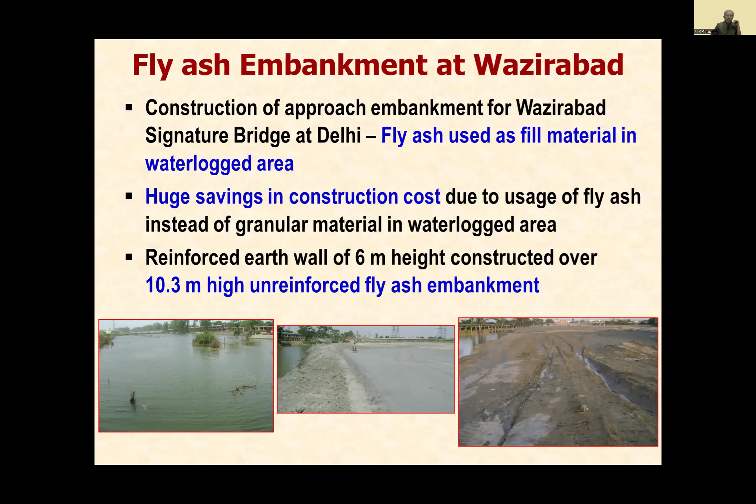Whatever construction machinery we use for conventional materials and conventional construction, the same type of machinery will have to be used. Only in one or two rare cases a little modification may be required, but that is not the rule. Generally we use the same type of machinery and the same construction methodology also. Next slide.

At that time, some apprehensions were raised whether this would be environmentally safe. So we conducted environmental tests also. As you can see from this slide, whatever heavy metal content is there in the fly ash samples, it is similar to earth also. Next slide.

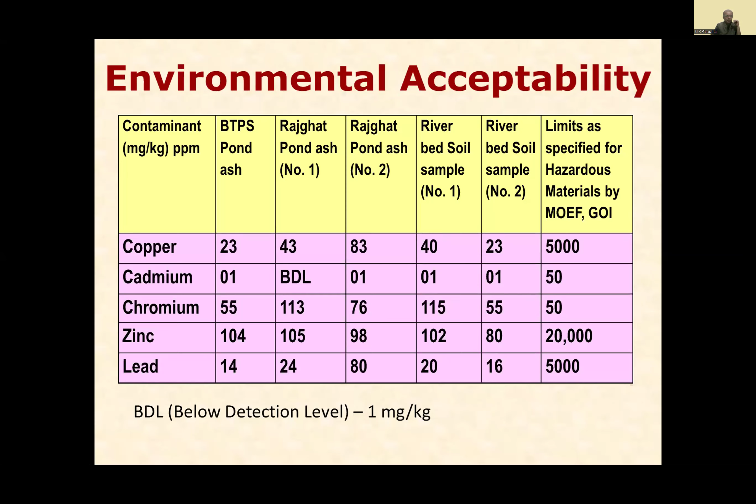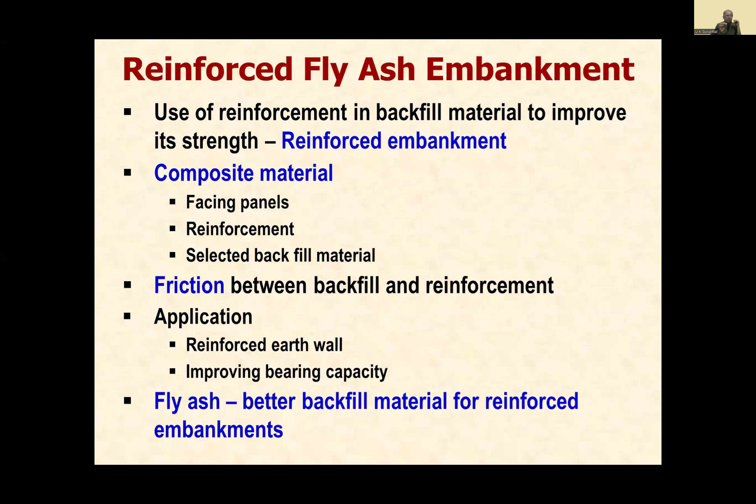We can construct reinforced fly ash embankments also. The case study I showed you is an unreinforced embankment. For reinforced embankments, fly ash is a better fill material compared to silty soil. Silty soil, of course, we cannot use in reinforced earth embankments. Whereas fly ash, because it has very good permeability and a very high phi value, is the most ideally suited material for reinforced embankments. Next slide, please.

Guidelines are also available for stabilization as well as embankment construction from the Indian Roads Congress. Next slide, please. Waste plastic is another important material investigated by the Flexible Pavement Division of CRRI. For this also we have IRC SP 98, which gives very good details about how to use waste plastic. Next slide.

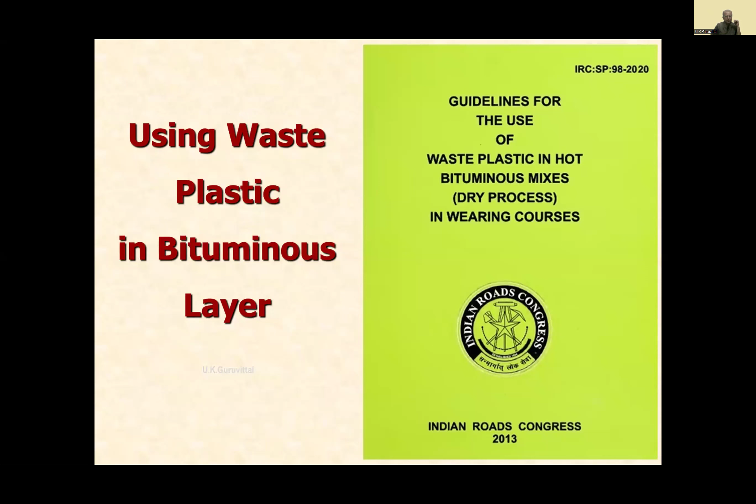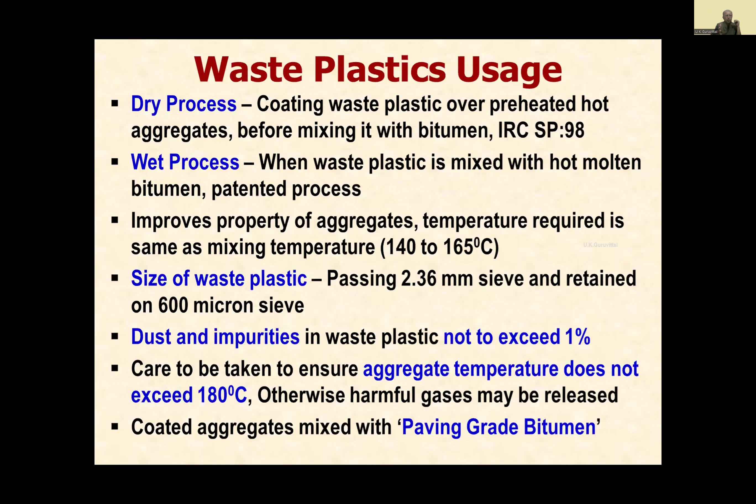There are two different processes for using waste plastic, as you all know: the dry process and the wet process. We have to clean the waste plastic and shred it to a size that passes 2.36 mm. This guideline is mostly for the dry process only. For the wet process, we have not yet brought out any guideline. So it is used in the dry process. Next slide.

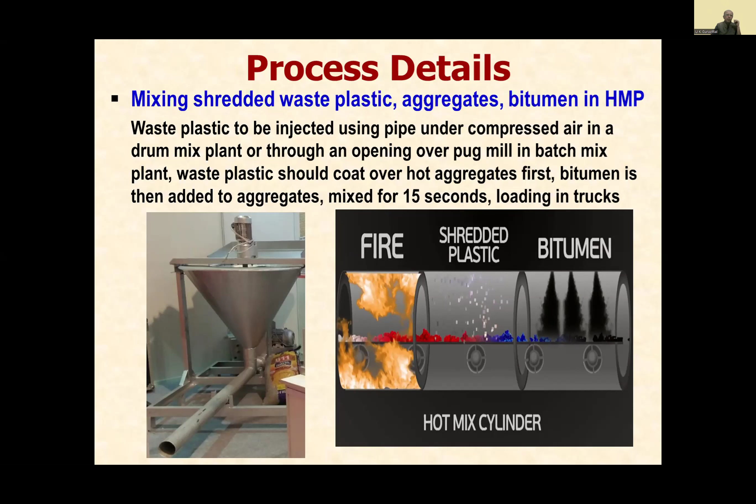This is the manner in which the waste plastic is shredded and readied for mixing with the bituminous mix. Next slide. When we use a drum mix plant, there may be chances of the waste plastic getting burnt, so a special arrangement is to be made for feeding it to the drum mix plant. If you use a batch mix plant, these problems will not be there. Next slide.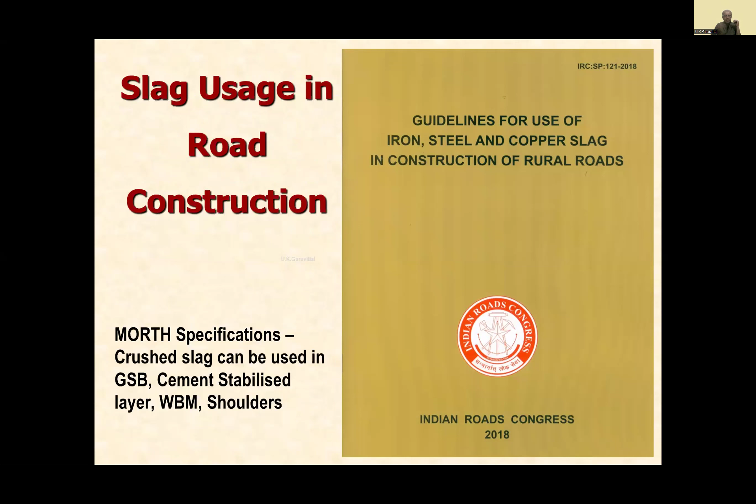Some details with regard to copper slag. Copper slag we get at two locations in our country, Dahej and Tuticorin, and this material is similar to sand, similar to coarse sand, and that's why it will be having a very good phi value, very good permeability, very good CBR, etc.

But of course, the one point which we'll have to keep in mind is that it's very heavy. It is having some iron content. When copper is extracted, iron will be left out, and so its specific gravity will be more. Its density will also be more. So that point we'll have to keep in mind.

Next slide. So test sections were constructed by CRRI and they were monitored on NH sections for this embankment. You note that previously, as I told, the embankment is to be constructed using the waste material in the core of the embankment, and the side slopes are to be protected. Next slide.

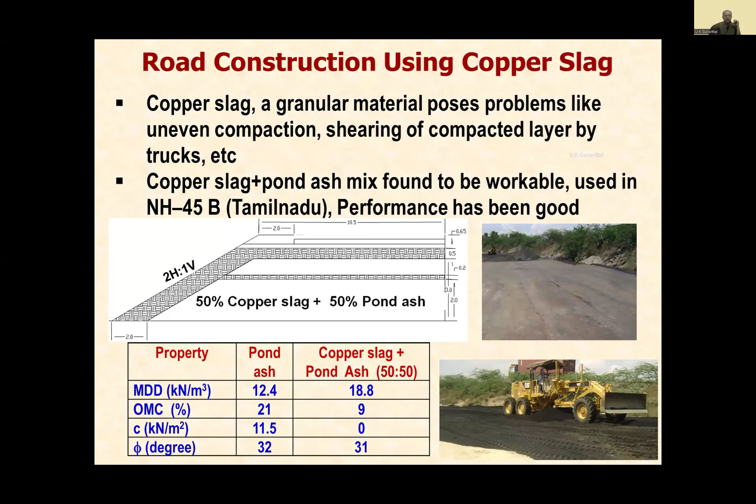This is with regard to C&D waste. Of course, this is the IRC guideline, IRC 121, and BIS code. In formulation of these guidelines and codes of practice using C&D waste, CRRI had a major role to play. Next slide.

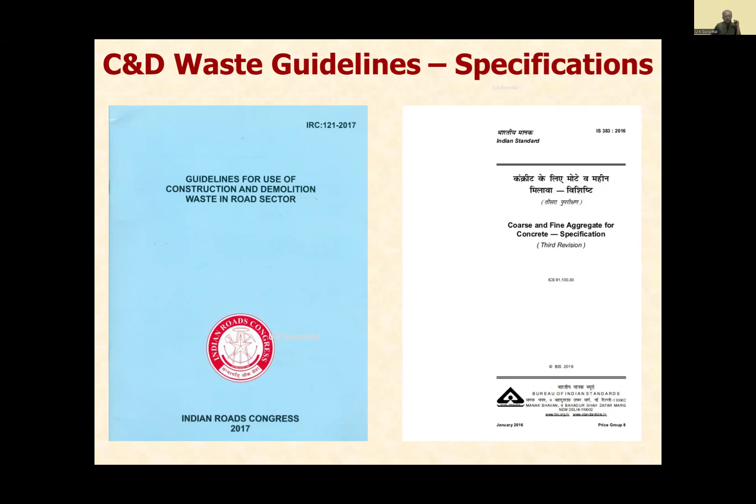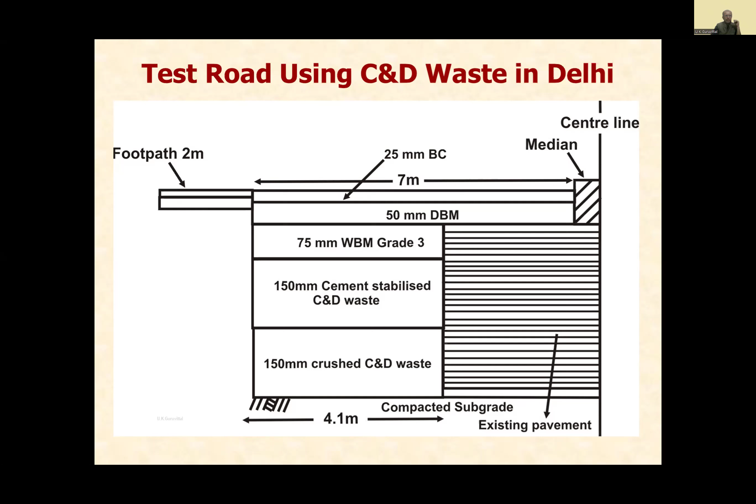So we constructed the test roads using the C&D waste. This one for embankment, this pavement construction, pavement widening in Delhi for colony roads. So we used it as a cement stabilized layer. Next one.

These are some photographs, cement stabilization. The already existing pavement was there, blacktop you can see, and the road was being widened. And in the widening portion, we used this material with cement stabilization, and of course, it worked very well. The C&D waste has got very good properties if we are going to stabilize it using an additive like cement.

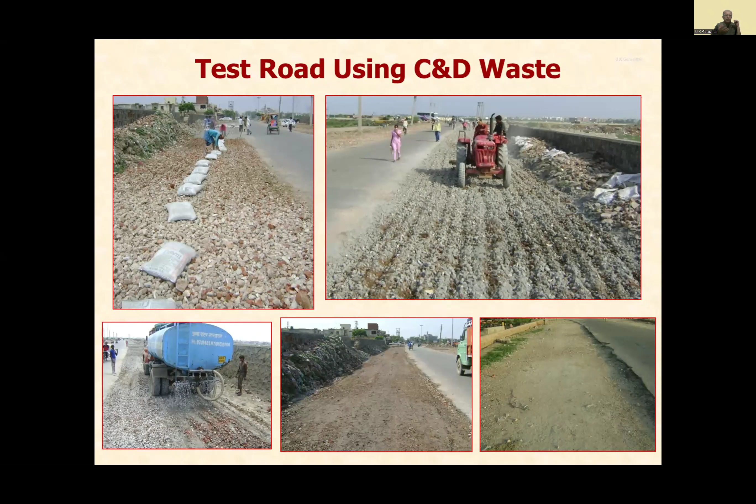Next slide. And another project was where we used it in a DDA road near Bakkarwala in Delhi, and there the issue was that the water table was very high, very close to the ground level, and it was a kind of a slushy area, daldal jamin jo hum kehte hai, so slushy area, and in that area we had to excavate that slushy soil, backfill it with a good earth, and then construct our road. The backfilling with good earth is a very costly process. So instead of that, we successfully used C&D waste.

Next slide. So this is the photograph, how the road area looked after excavation, and then this crushed C&D waste being used and compacted there. Next slide.

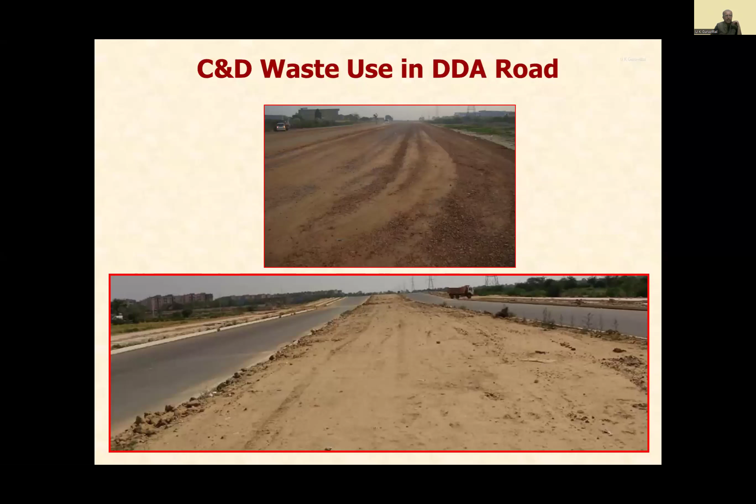Then the road was built. You can see the finished road section, and it has given very good performance without any settlement, without any rutting, without any unevenness problems. And so that shows that if we look at our quality control aspects, etc., whatever the waste material is, that can be successfully used. Next slide.

Next is phosphogypsum. This is a waste material from the fertilizer plant. This is available at many locations in our country. CRRI has also worked on this. My colleagues, Dr. Anil Sinha and all, have worked on this material, and we have constructed a test track also.

The specialty of this material is that it has some gypsum. So that's why when water is added to it and compacted, it hardens. So when this material hardens, the CBR value is very high. The UCS value, unconfined compressive strength value, is also quite high.

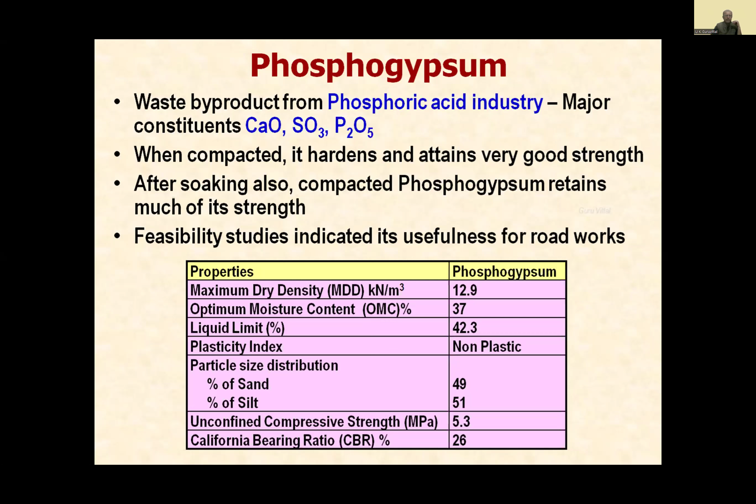Red mud is also available in a few states like Jharkhand, Odisha, etc. It's a bauxite tailing waste from alumina production, and this material, from an environment point of view, we'll have to use in a careful manner. This has been very successfully tested in our laboratory.

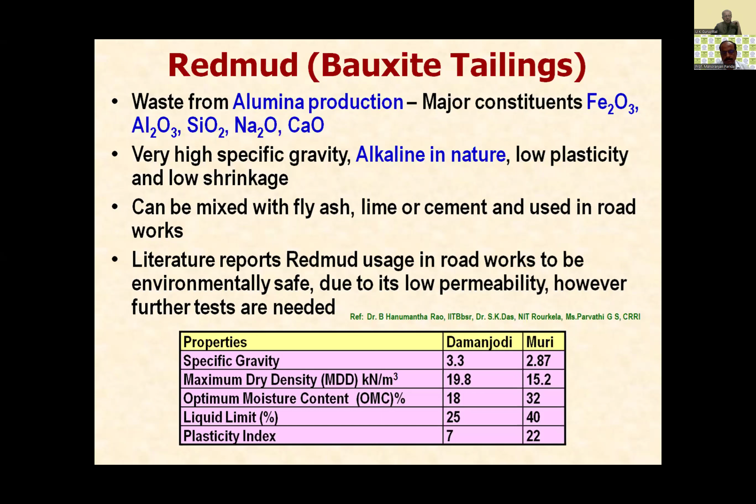Marble slurry dust is another important material. We have so many marble quarries in Madhya Pradesh, Rajasthan, etc. When we extract marble, this slurry is produced, and when it hardens and dries up, we get the dust. This marble slurry dust is a huge headache for this industry, and this can be used in our roadworks.

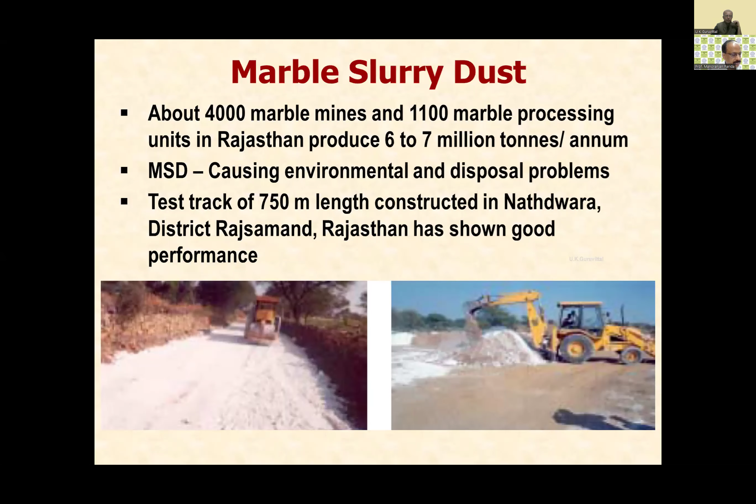In a similar manner, Jarofix is a waste material from zinc tailings. Kimberlite is a waste material from the diamond mining industry.

Processed municipal waste, which of course we get in any city area. All these materials have been successfully tested and characterized at CRRI, and many test sections have also been built, and the performance of these test roads has been successful.

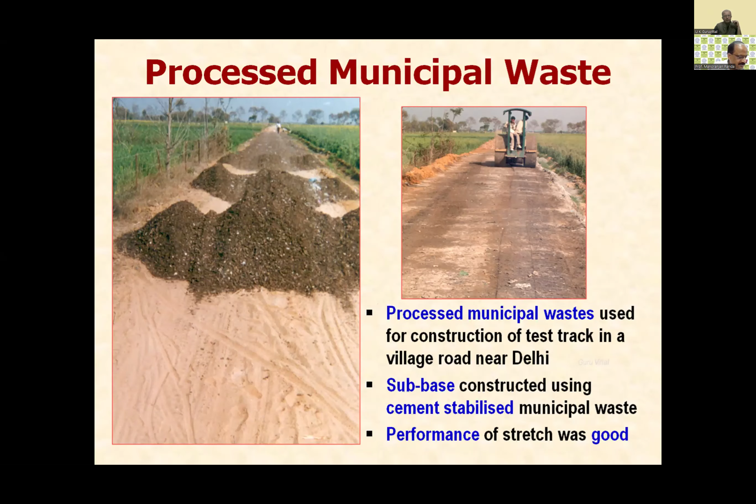Now just 1 or 2 minutes I'll take to complete my presentation on the stepwise procedure for using local material. I'm not using the word waste material, because it's not a waste material, it is a resource material for our road work. So let me use the term local material.

Whatever local material is there, like quarry dust, quarry waste, or quarry reject, fly ash, slag, C&D waste, etc., it first has to be identified, which is available within economic lead from our road construction project, and whether it is available in coarse aggregate form or sand form or a combination of these two, we'll have to find out.

If it is available as coarse aggregate, we can use it as an aggregate in our WBM layers, etc. If it is available as a sand material, we can use it in our sub-base course, etc.

The next thing is to characterize the material. What are the engineering properties we'll have to find out? AIV and gradation, water absorption, flakiness - these are with regard to aggregates. If it is a finer sand-type material, we have to find the gradation, plasticity, Proctor test, and CBR value, etc.

The next important step is to ensure that environmentally the industrial waste material is acceptable. It will not create any environmental problems, it will not release heavy metals into the underground water or into the subsoil. So that has to be done, and we have very good protocols for that kind of environmental acceptability test.

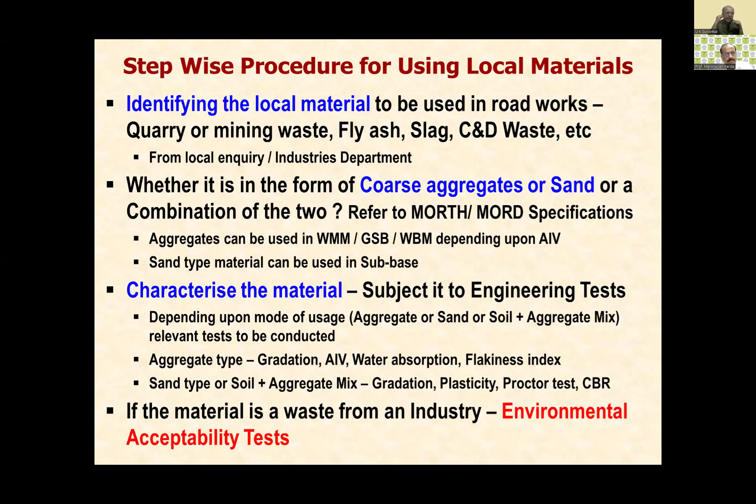Once we are through with all these tests, we will have to decide whether we can use it as such or after improvement. Improvement usually means stabilization - finding what mix is required, maybe mechanical stabilization or additive stabilization like cement stabilization, etc. These are all very well defined procedures, and IRC SP 89 can be referred to for taking up these works.

Using this material in a wearing course will have to be a little more careful, because in the wearing course the stresses will be more, so we'll have to look into those issues, and mix design will also be done very carefully, entering an agreement with the generator or supplier for the supply of these materials.

Next slide, you have to wind up. Yeah, this is the last slide, sir. Okay, this is the last slide.

Pavement design as per the IRC guidelines, rate analysis we have to do, it has to be incorporated in the DPR, and we go ahead with construction and performance monitoring, and definitely it can come into the guidelines that we have already shown. So this is the outline of the procedure that we need to do for some of the materials for which guidelines are not available. Thank you, sir.

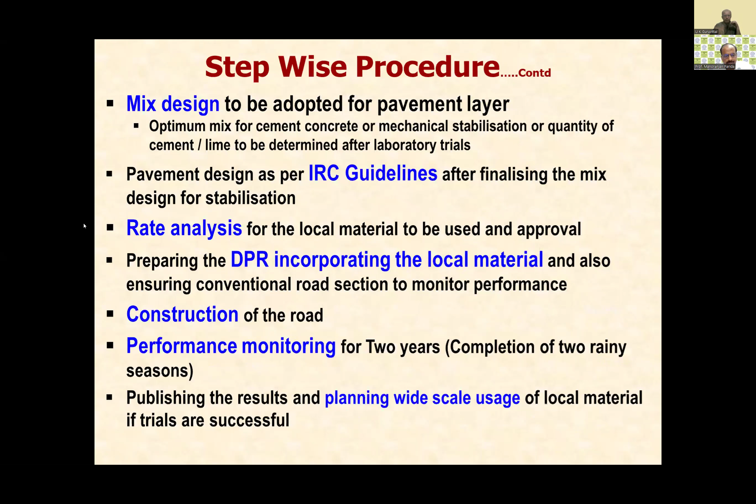Before opening up, I'll say that the three presentations were very important. Mr. Guruvittal has worked very extensively on these various waste materials while at CRRI. Our colleagues at CRRI are also working on this.

And obviously that has led towards development of various IRC codes, because that's the only document that gives support and increases the confidence amidst the users that yes, this material can be put to use. And JSW has demonstrated that, like Mr. Satish Kumar gave great examples for infrastructure, not just roads, highways, airports, but also breakwaters. There could be a great range of applications.

And Dr. Bhupinder Singh talked about the research. Mr. Guruvittal said that these materials are going to have similar and dissimilar properties, and wherever there are dissimilar properties, that provides a challenge to carry out research on that. Dr. Bhupinder Singh presented on usage of recycled aggregates for road construction, so there will be a lot of properties and characteristics which do not exactly fit into conventional material. So then you need to undertake deeper research to make those modifications, so that's how they can be utilized.